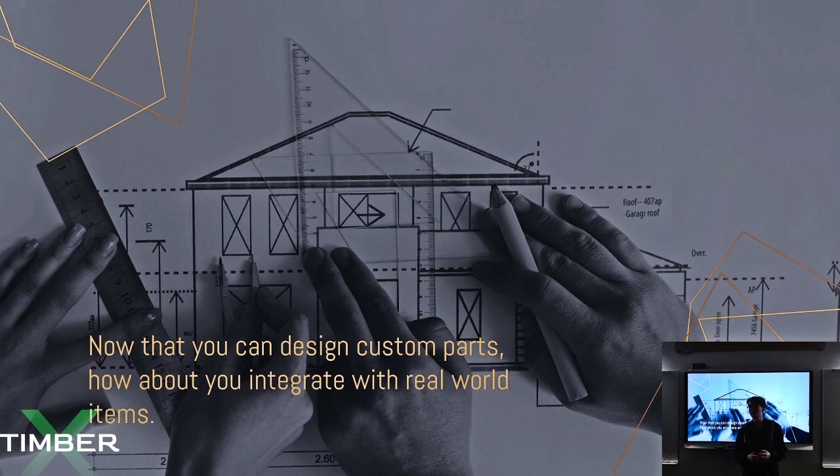Hello, I'm Phoenix Burke of TimberX Robotics, team 17682, and today I'm going to show you how you can design custom parts and integrate them with objects and things in the real world. So let's get into it.

First off, you're going to have to measure real world items to design them in Fusion 360. The first one I'd like to show you is called a caliper. These can be useful for measuring things you can't really do with a ruler, such as this marker, which would be kind of hard since it has round edges to get its length.

With this, you can use the outside jaws to easily find the length of the marker, which can be very useful. It also has these back edge jaws, or whatever they're called, which you can use to find the length of something on the inside, like the inside of a marker. You can also use this end stick to find the depth of something, which is very useful.

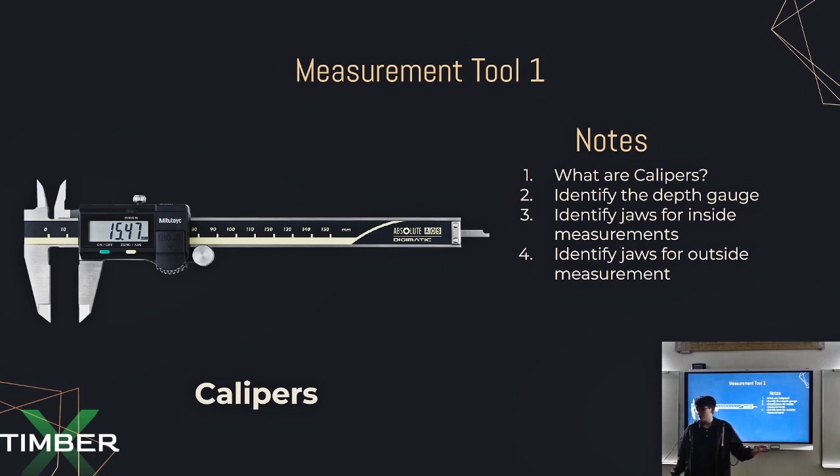So calipers are very nice to have if you're going to be using Fusion 360 and modeling something in the real world. Something else we could use is a protractor. I'm sure you've heard of and used a protractor in your life, in school or wherever you are currently. It's very good for finding angles, so to model stuff you might need to find a certain angle of an object.

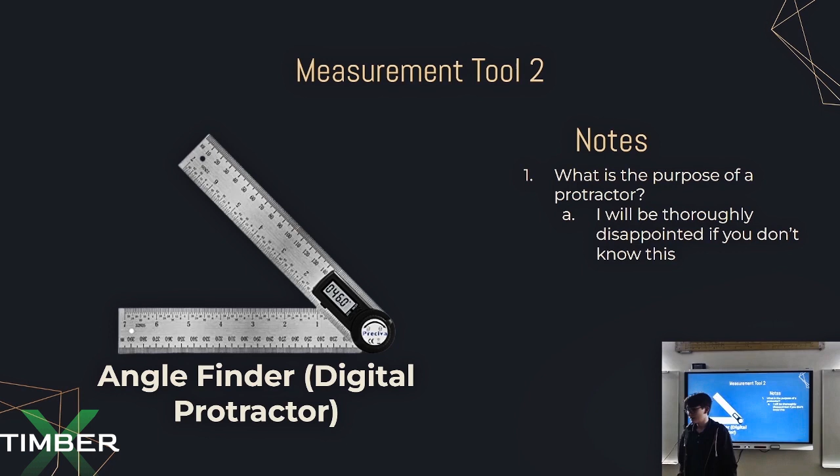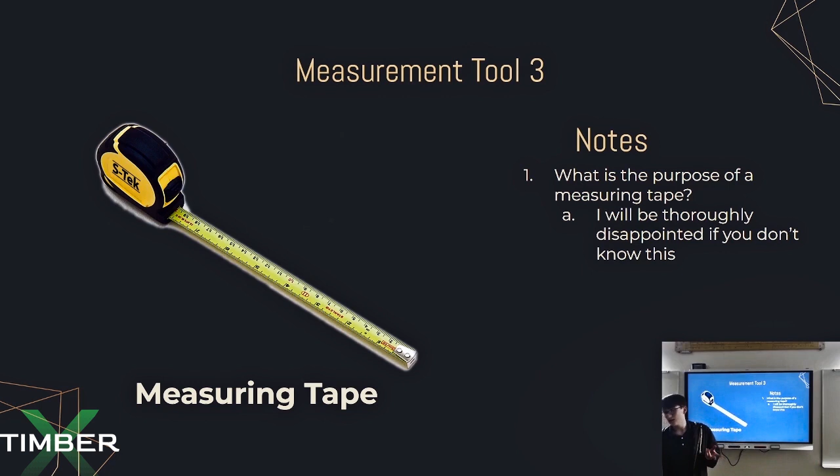A measuring tape is a very common tool, I'm sure you've also seen this. It's very good for finding the length of anything that's more or less straight, unlike a caliper. Calipers are good for smaller things and something that you can't easily do with a ruler or a measuring tape, so it can be very useful.

Now, for me and you, I want you to design something in the real world. For instance, you could use a phone, a tissue box, or a piece of paper. For me, I'm going to be using a small little whiteboard.

So first off, what we're going to have to do is measure it with a measuring tape. If we measure one side, we get that this length is 1 foot. And then if we use the other side, we see that it is 9 inches.

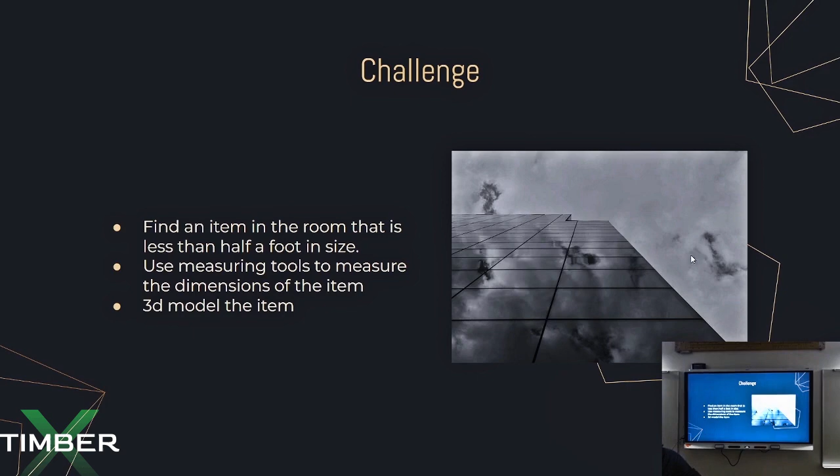So if we go open up Fusion 360, you want to create a sketch. Find a plane, create a square. You want to do 1 foot, 9 inches.

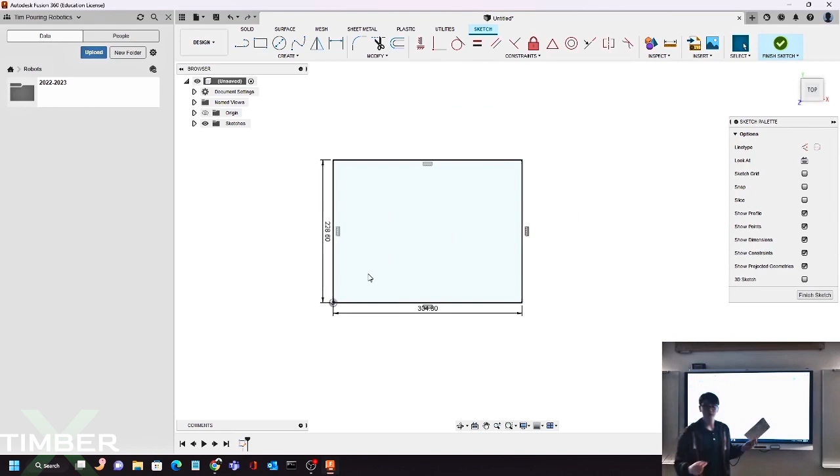And then what we're going to want to do, we can use a caliper to find the width of this, or how thick this is, which should be about 3 millimeters.

So if we go here, actually first off I'm going to use the fillet tool, because it'd be easier to do it here than later on. So if you have round edges like this on a whiteboard, you can use the caliper to find the length of these edges.

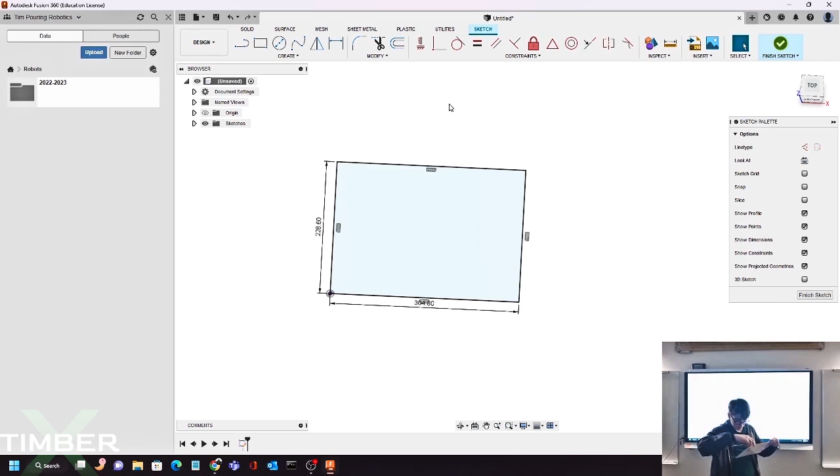And you get about 12 millimeters. So if we use the fillet tool, you can select the edges you want to fillet, and I'm going to be selecting all of here since every single edge is curved. So we offset it by 12 millimeters, and it should look like that.

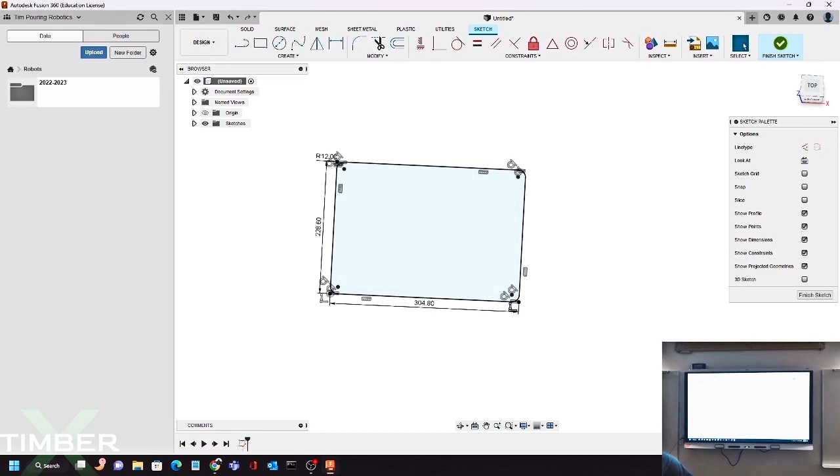Then all we need to do is, with the measurement we found earlier, 3 millimeters, we can finish the sketch, and then we can extrude it up 3 millimeters. So there we go, I have created this whiteboard in Fusion 360 using the tools that I've shown you.